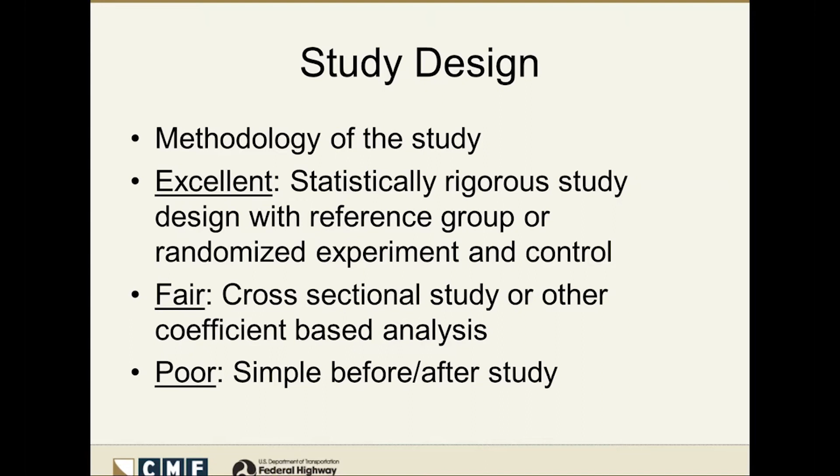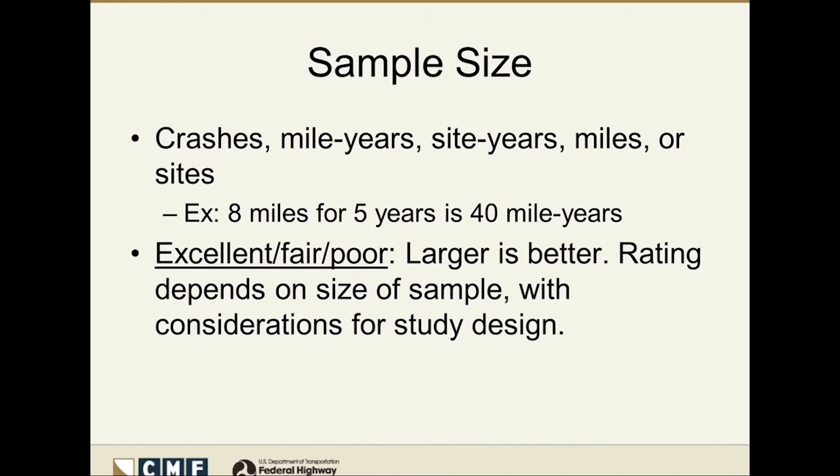The second criteria is sample size, and this is just reflecting what was the data used to develop the CMF, and this could be the number of crashes that were used, mile years, site years, miles, or sites, mainly being intersections in this case. And just FYI, a mile year is if you had 8 miles in your study and you studied it for 5 years, you have 40 mile years. So it depends on how the authors report the study details as to what they used. But we look at that to see what is the sample size, and of course, larger is better. And the exact rating depends on the size of the sample, with some considerations in there for what type of study design was being used.

The third one is the standard error, which is a statistical indication of the reliability of the CMF value itself, so numerical value here. And this one, the rating depends on the significance level. So if the CMF is significant at a high confidence level of 95%, and the example there shows a CMF of 0.8, so some decent reduction to whatever countermeasure the CMF is referring to. If the standard error is 0.05, that's a pretty low standard error, and that CMF is significant at a 95% level, so that would get an excellent rating.

Fair rating would go to those CMFs that are significant at 90% but not at 95%. So if you have that same CMF of 0.8, but the standard error is now higher at 0.11, that would land in the fair rating. And then a poor rating would be those that aren't even significant at a 90% level. So if you have that 0.8 CMF, a standard error of 0.2 or anything greater than that would be not significant at that level.

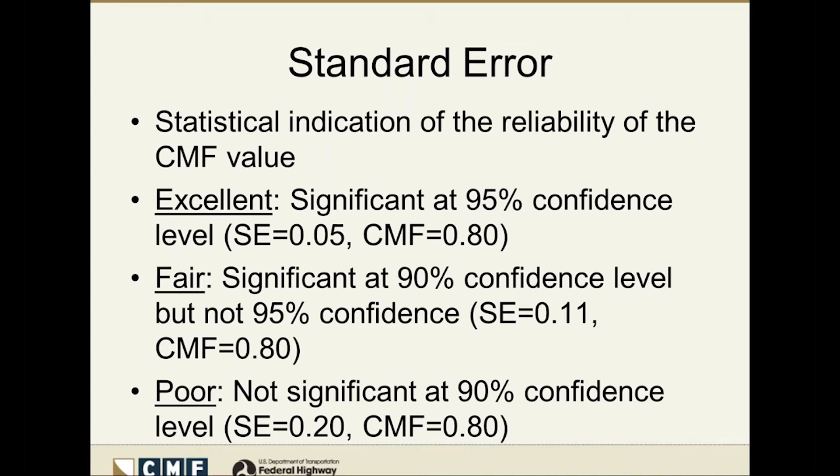Potential bias is the fourth criterion. This is a bit more of a wide open category in terms of looking at any biases that were observed by our review team here. So this could be anything from the makeup of the group of sites that were used for the study to issues with the analysis or the modeling, anything like that. And just in general, if there are biases noted, it brings down the rating here, so it's a better rating for fewer biases.

And the last one is data source, and it really deals with the diversity of the data used to develop the CMFs. And basically, the more diverse the data, the better the rating. So an excellent rating would be diversity of multiple states with different geographies, so representing a lot of different types of conditions, basically leading to a CMF that can be more widely applied.

Fair would be if the CMF was developed using sites within just one state, but throughout different areas of the state, perhaps California, but from the north and the south parts and all over. Whereas the poor rating here would be just, let's say, one town in one state, one city in one state, so limited diversity there.

All right. So for example, if you were to do a search and you're looking at installing a traffic signal, you're going to search on the clearinghouse, and of course we search by the countermeasure name, and I'm going to use the fewest keywords possible to give me a fairly wide set of results.

All right, so you can see that we've got 581 CMFs returned for that search, so a pretty large stack of CMFs. Because this is going to involve anything that has a keyword that involves signal, which also could be something like signalized. Anything that involves those six letters essentially is going to come up in this search.

So then we can use the filters to bring that down somewhat. Let's say I might be interested only in CMFs that are 3, 4, 5 stars. Because I have such a large stack, I can filter down and just look at those higher rated star CMFs. So click on those and click filter, and now it brings the total to 389. Okay, so we've whittled that down some.

Going further down, I might be interested in only angle crashes at the particular intersection, so I can go under crash type and select angle crash and do another filtering. I can come down here and click on filter results. That brings the set of results down a pretty good bit. I'm left with 38 CMFs now, and these are CMFs that are for angle crashes and are also 3, 4, or 5 star rated.

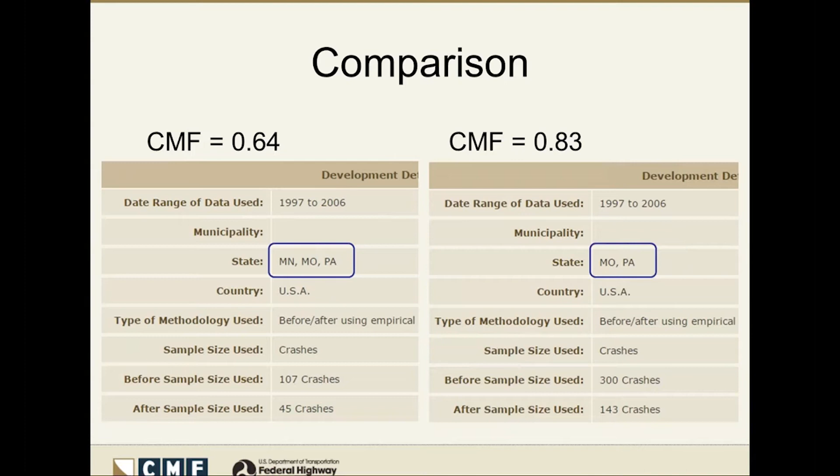I wanted to mention a few other features we've got on the CMF Clearinghouse, a few recently added. We've got a reorganized navigation, which I'll look at in a second. We've added a user guide for new users or those who don't have as much experience. A resource I want to point out is the state CMF lists, and then I'll mention an upcoming tool we've got. If you'll pardon me, I'm going to go back over to the website to show you some of these.

Okay, so on the front page of the Clearinghouse, some of you may have noticed that across the top, the navigation bar has been restructured, really trying to group the resources we're offering in terms of the different ways in which you use CMFs. So the first one there has a pull down, and it has everything about the Clearinghouse itself. I'll come back to that in a second.

Next to that is a group of resources for using CMFs, so guidance documents related to applying CMFs, and there are links for trainings on that topic.

The third one there is for developing CMFs, and this would be primarily for the researcher crowd who are conducting studies to develop CMFs. So we've got guidance there related to methodologies for developing CMFs, what data are needed, what are the protocols for reporting when you're authoring a study, as well as resources about CMF needs for future studies.

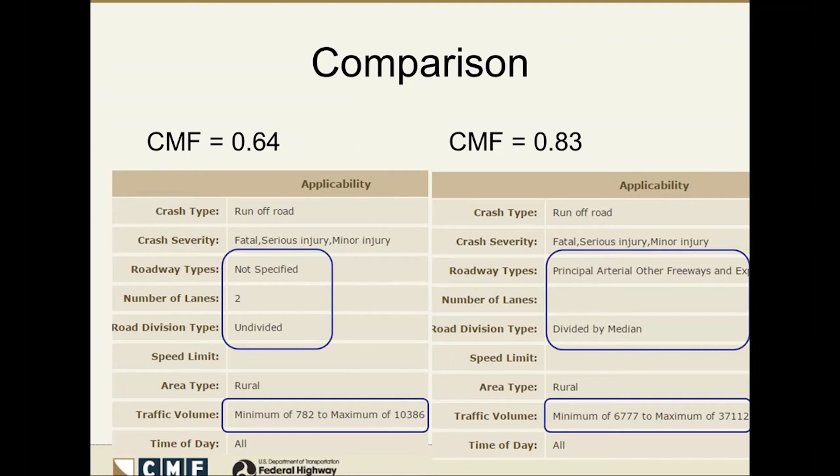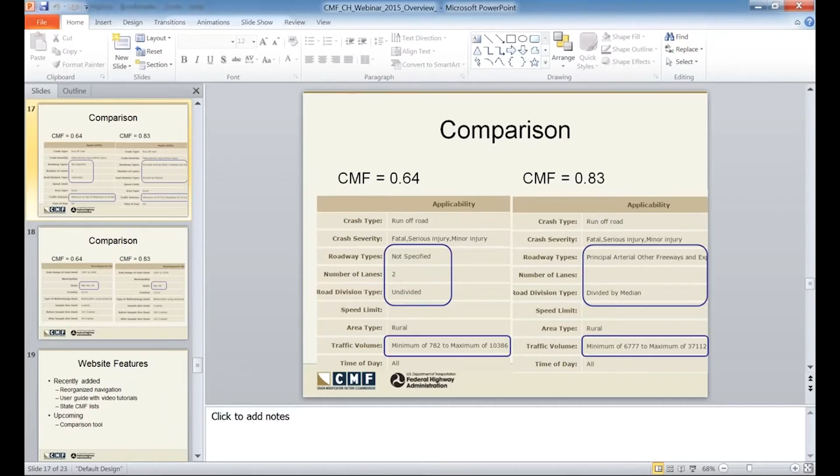Yeah, okay. Well, as Caroline is changing control over to Frank Gross, I'll just go ahead and introduce Frank, who is a member of our CMF Clearinghouse team. And as Karen said, there was a lot of interest in crash prediction models and the use of CMFs in those. So we're going to hear from Dr. Frank Gross now.

All right, thanks, Daniel. How does everything look? Yep, we can see your screen. All right, terrific. All right, welcome everyone.

And I just hit my afternoon lull, so how about a little bit of acronym soup to get us started? I've been told that a large dose of acronyms is even better than coffee for that afternoon lull, so let's give it a try.

So CMFs and CPMs or SPFs. Just to clarify, CPM stands for Crash Prediction Model, and SPF stands for Safety Performance Function. I think we're all familiar with the term CMF by now, but CPMs and SPFs are really the same thing. They're equations that provide us a method for predicting crashes based on traffic volumes and perhaps other site characteristics. So what we're really talking about is CMFs and the predictive method.

Just a quick look at where we're going today. I'll start with a brief overview of the predictive method, which is Part C of the Highway Safety Manual, and then I'll provide another quick overview of Part D of the Highway Safety Manual, which is individual CMFs. And then I'll wrap up by pulling this all together and providing a little bit more of a detailed discussion on how to use CMFs from Part D or from the CMF Clearinghouse with the Part C predictive method.

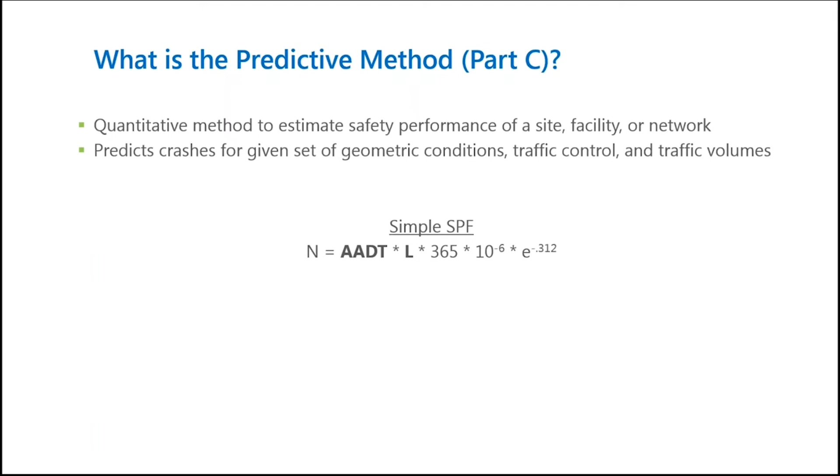The first equation is an example, a very simple example of a safety performance function from the Highway Safety Manual, and this SPF represents the equation for rural two-lane undivided roads. So the predicted crashes, N, on the left-hand side of the equation, is a function of segment length L, traffic volume, which is AADT in this case, and then the remainder of the equation, which is all multipliers.

So that was a very simple example. Here's a little bit more of a complex SPF. Some people might call it a crash prediction model, in that it includes other variables. In this case, you have additional variables beyond traffic volume to account for the number of nearby driveways and the intersection skew angle. So this SPF is related to intersections.

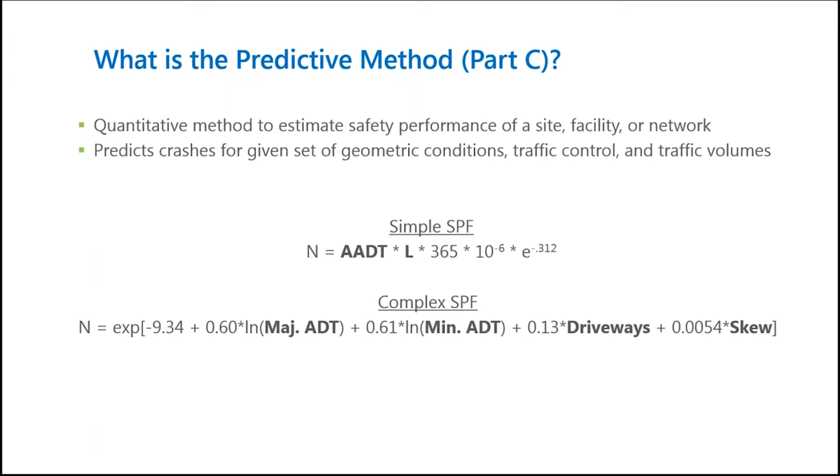So the purpose of the predictive method, as I mentioned, is really to help consider safety performance in the decision-making process. It provides an opportunity to, one, quantify the safety performance, either of an existing or a proposed facility. You could also compare the safety performance of various design alternatives. You can use the predictive method in evaluating the safety effectiveness of projects. And as I'll discuss a little later, you can use this method to help justify design exceptions based on safety impacts.

The photos at the bottom of this slide represent a before and after condition for an actual project that was implemented. The planners and designers of this project could have used the predictive method to estimate the safety performance under these two conditions before making any final decisions. Ultimately, they decided to convert the 4-lane undivided facility on the left to a 2-lane median divided facility shown on the right. The predictive method can help you estimate what the crashes would be under those two scenarios.

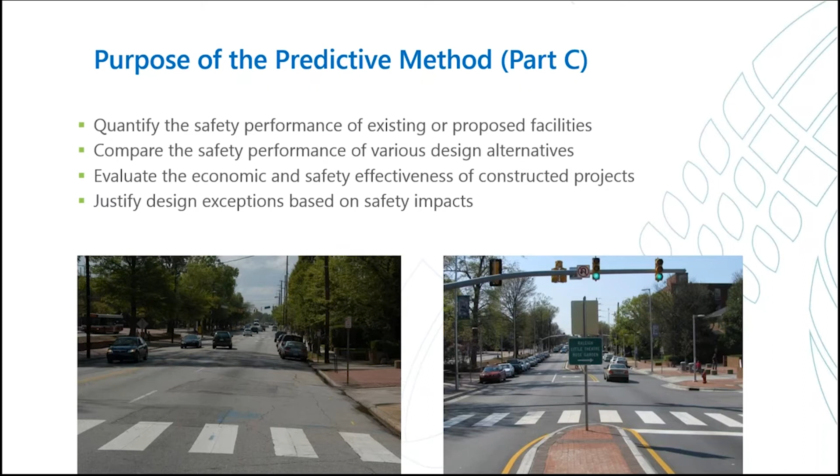All right, so that was a real brief introduction to the predictive method, and I think most of us are familiar with CMFs in general, but just as a real quick overview, CMFs provide a quantitative method to estimate the change in safety performance when you have a change in site conditions.

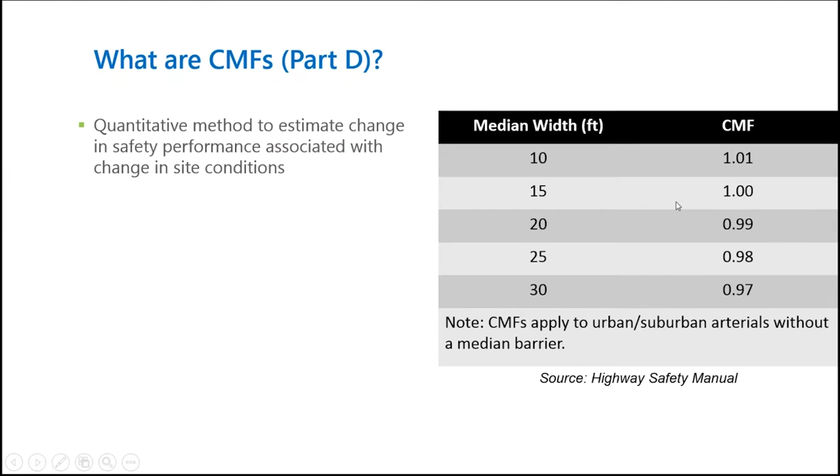The example on this slide shows CMFs from the Highway Safety Manual related to median width. In this case, the baseline condition with a CMF of 1 is a median width of 15 feet, and the other CMFs show what would happen if you were to decrease the median width to 10 feet or increase the median width from 20 to 25 to 30 feet. You can see what the percent reduction in target crashes would be.

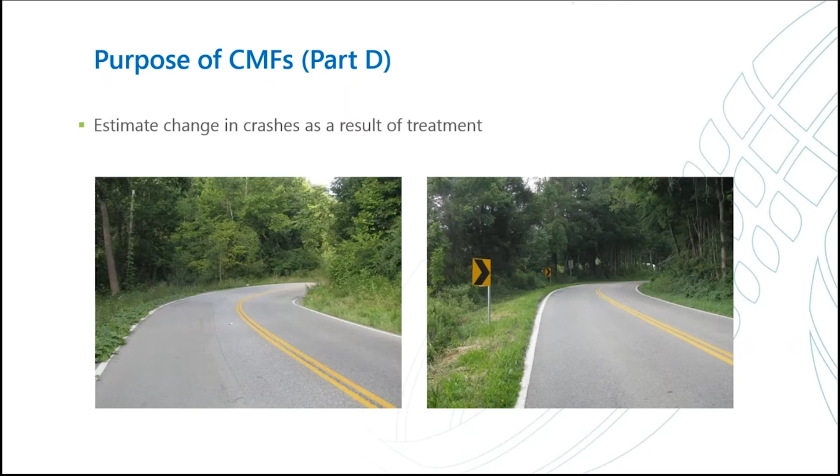So again, the purpose of CMFs is really to estimate the change in crashes as a result of some potential treatment. Another example is to determine the effect of adding chevrons on a rural horizontal curve. And I think most of us are fairly familiar with this process.

So how are CMFs integrated or used in the predictive method? They're primarily used to adjust the base predicted crash frequency from SPFs. SPFs give you some predicted number for a set of base conditions. And if the location of interest differs from those base conditions, then you need to adjust that prediction to the conditions of interest. So there's two primary ways to adjust that prediction, and this is an important distinction and really kind of the underlying point of this presentation.

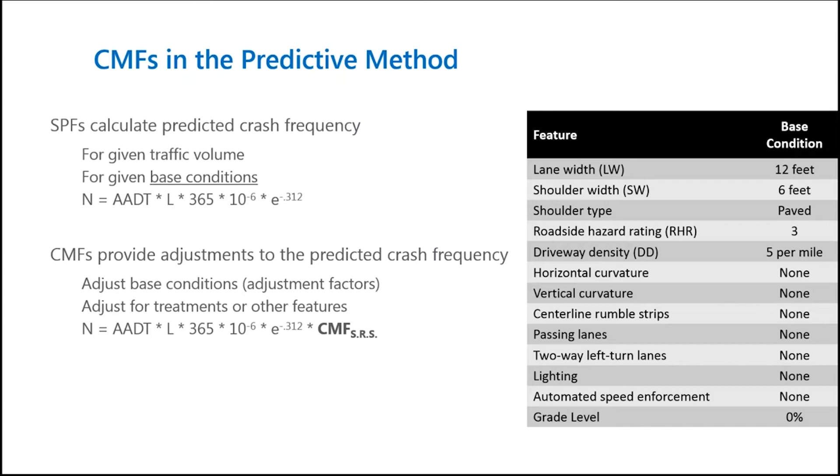Here's an example, a very simple example using the Part C predictive method with some basic adjustment factors. In this example, a design engineer wants to calculate the predicted safety performance of a 1-mile section of rural two-lane road with a traffic volume of 6,000 vehicles per day. The first step is to identify a suitable SPF and the associated base conditions. In this case, the SPF is given from the Highway Safety Manual, and the base conditions are shown in the table on the right, along with the proposed conditions.

The predicted crashes is calculated by simply plugging in the traffic volume and segment length of 6,000 vehicles per day and 1 mile, and that results in 1.6 predicted crashes per year. Now that is for this set of base conditions: 12-foot lanes, 6-foot paved shoulders, and so on. Now the condition of interest differs. The designer is interested in 11-foot lanes and 2-foot shoulders. So we need to identify and apply adjustment factors from Part C of the HSM.

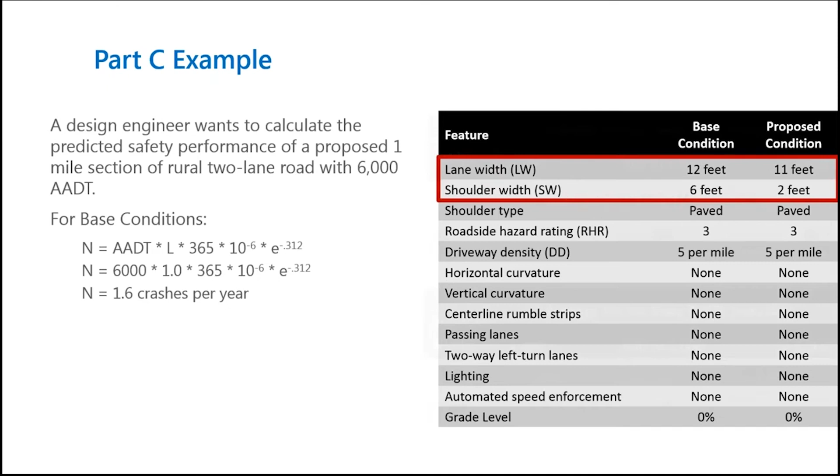Taking those adjustment factors, we can apply them directly to our base prediction. Our base prediction was 1.6 crashes per year. We multiply that by 1.05 and again by 1.3, and estimate 2.2 crashes per year for the conditions of interest.

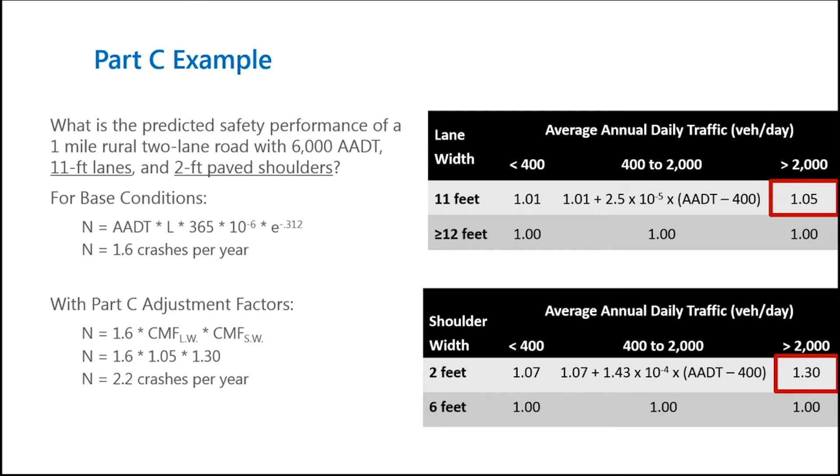That covers simple adjustments from the Part C predictive method using the Part C adjustment factors. Now let's briefly review how to apply CMFs from Part D of the HSM for another condition.

I'll use another example. In this case, a traffic engineer wants to estimate the potential safety effect of installing a traffic signal at a rural stop-controlled intersection. Let's assume there were 50 crashes over a 10-year period, an average of 5 crashes per year, and the CMF for this treatment is 0.56, applied to total crashes.

Applying the CMF of 0.56 to the 5 crashes per year without treatment, we estimate 2.8 crashes per year with treatment. This is equivalent to a reduction of 2.2 crashes per year if we subtract the crashes with treatment from the crashes without treatment.

One note here: this is a very simple example, and I used the average crashes per year without treatment to estimate what we would expect if we didn't install a traffic signal. You could use the predictive method to do the same thing, using an SPF to predict what would happen with the given traffic volumes if you were to remain under the stop control condition, which would help improve the reliability of the results.

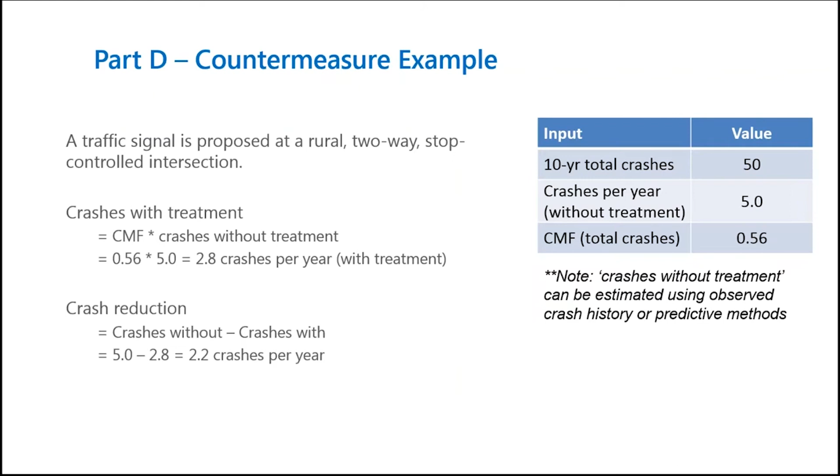All right, now let's pull it all together. Going back to the first example, let's assume the designer is considering shoulder rumble strips to address a known issue with runoff road crashes. If we review that table on the right again, there are no base conditions or adjustment factors in Part C for shoulder rumble strips.

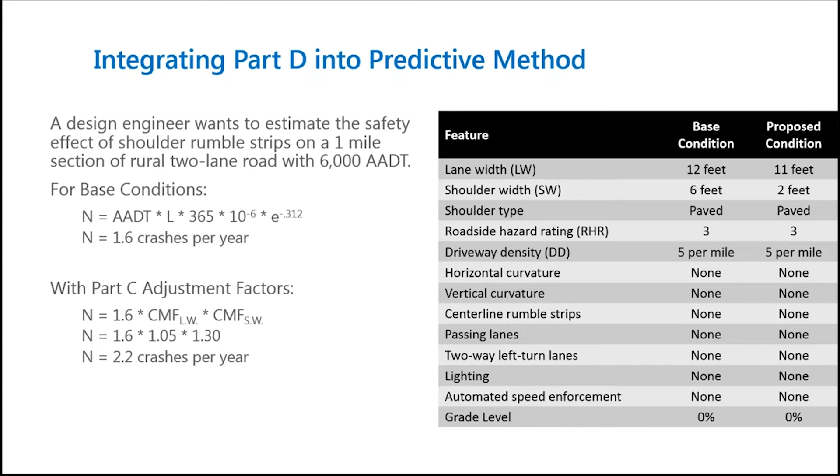So in this case, you'll need to pull a CMF from Part D, or from the CMF Clearinghouse, or another source. Part D does not contain any CMFs for shoulder rumble strips for 2-lane rural roads either. So I went to the CMF Clearinghouse, and as Daniel showed, there are hundreds of CMFs for installing shoulder rumble strips there. I was able to narrow this down to CMFs with 4 or more stars for rural 2-lane roads that apply to total crashes.

I used the filters and got down to 4 CMFs, still with 4 choices, and the difference here is the state they were developed from. In this case, let's assume we're considering a roadway in Pennsylvania, and the designer determined that the CMF from Pennsylvania was most applicable. So we'll use the CMF of 0.76 for adjusting the predicted crashes even further.

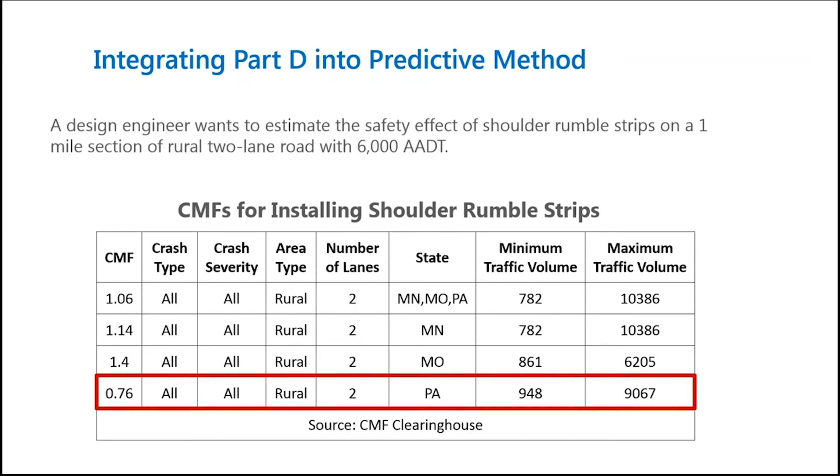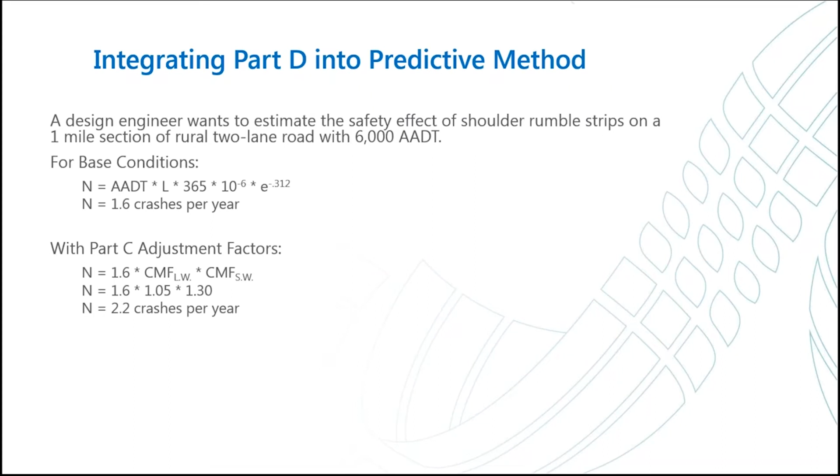Previously, we estimated the predicted crashes per year for base conditions using an SPF from Part C of the Highway Safety Manual - that was base conditions with 12-foot lanes and 6-foot shoulders. We were interested in a roadway with 11-foot lanes and 2-foot shoulders, so we applied adjustment factors from Part C. Finally, we can apply the CMF of 0.76 to this last prediction to estimate the number of crashes per year with 11-foot lanes, 2-foot shoulders, and shoulder rumble strips.

So you can see how this would be useful in the decision-making process, and more specifically in the design exception process, as I listed earlier.

So for example, if you're considering a design exception, maybe the design standard calls for a 12-foot lane and 6-foot shoulder, but existing conditions may limit your cross-section to 11-foot lanes with 2-foot shoulders. So you're able to see first how your initial proposed design exception compares to the design standard using the predicted crashes.

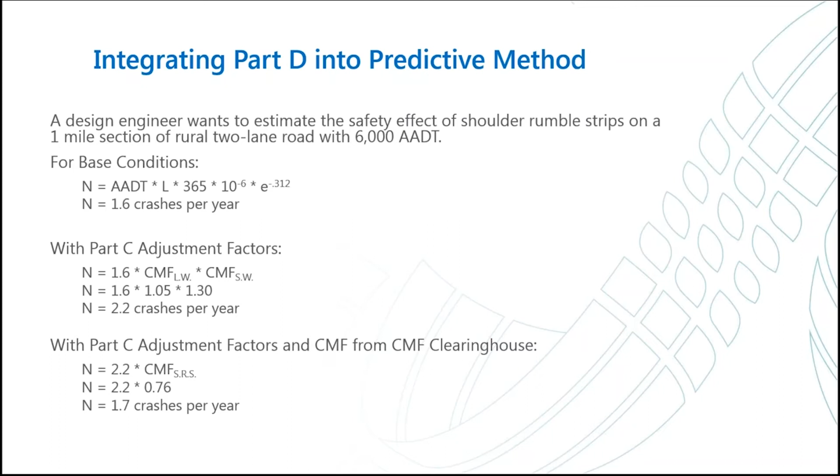And then you could justify mitigation measures saying, well, to mitigate the potential adverse impact of reducing the lane and shoulder width, we're going to install shoulder rumble strips, and now our predicted crashes are fairly close to what the predicted crashes would be for the design standards. So that's in a nutshell integrating the Part D CMFs or CMFs from the clearinghouse into the predictive method. So just to wrap up, let's talk about a few do's and don'ts.

So the first one is, do apply Part C adjustment factors to the applicable SPFs from Part C of the Highway Safety Manual. Do not, on the right-hand side, apply those Part C adjustment factors to other SPFs or to observed crashes if you're using observed crash history. So the Part C adjustment factors are specific to the Part C SPFs.

If you're using Part D of the Highway Safety Manual, you can go ahead and apply those to either the predicted crashes, as I've shown in the example, or to your average observed crash history, as long as your CMFs apply to your given scenario of interest. Excuse me.

So the don't with the Part D CMFs is don't apply those Part D CMFs to inapplicable scenarios. So for example, don't apply a CMF for total crashes to estimate the change in run-off-road crashes. Similarly, you should not apply a CMF for an urban 4-lane divided facility to a rural 2-lane road. So those are some of the do's and don'ts.

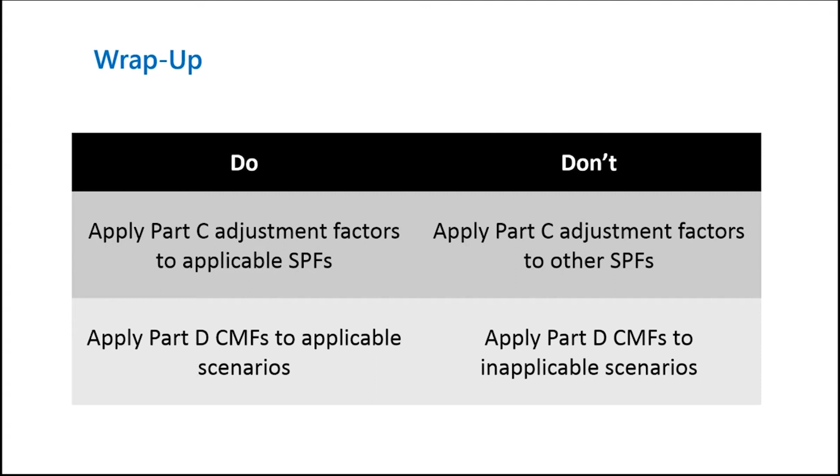And Daniel was thinking that we might want to make up a t-shirt and start wearing these around to remind everybody, and I thought that was a pretty good idea. So with that thought, I'll turn it back over and pass it on to Stephen. Thanks, Frank. And yeah, we're all about the marketing here in the clearinghouse, so make some swag to hand out here. Well, our next presenter is Stephen Reed from Virginia.

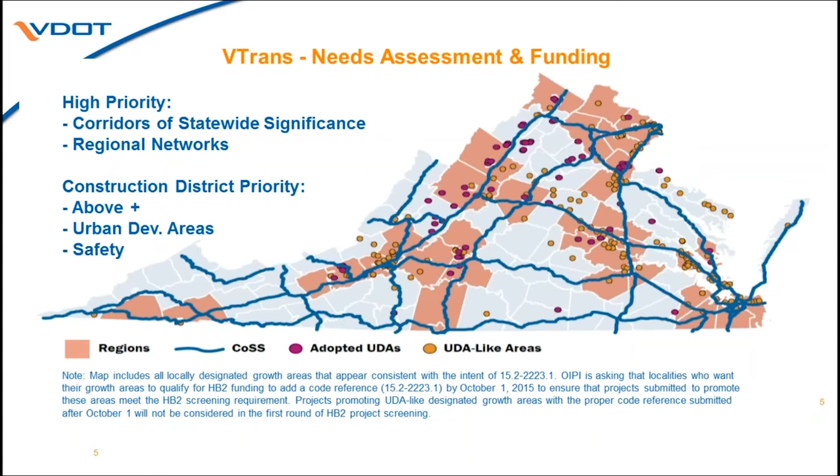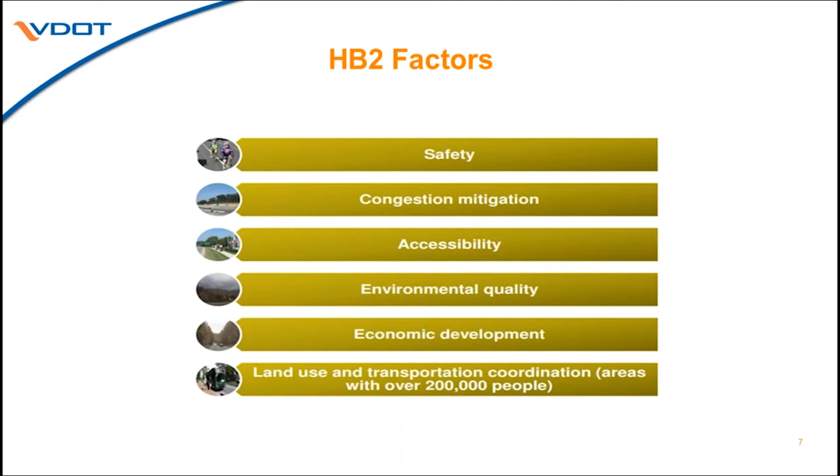There's accessibility measures, which involve some multimodal factors. There's environmental quality, economic development in terms of parcels that are served that are undeveloped at this point in time, as well as land use for those areas that are in the larger MPOs, those with over 200,000 residents. So although I put safety first, it is not the top factor by any means.

The state was divided up into what we're calling typologies, into different categories based on essentially land use density. And so you can see what we call our urban crescent of Northern Virginia, Richmond, and Hampton Roads, our higher level categories A and B, and the rest of the state more or less are categories C and D.

And so safety has a different factor and different priority in each of those different areas, with the value ranging from 5% in the more urbanized areas up to 30% of the total score in the more rural areas of the Commonwealth.

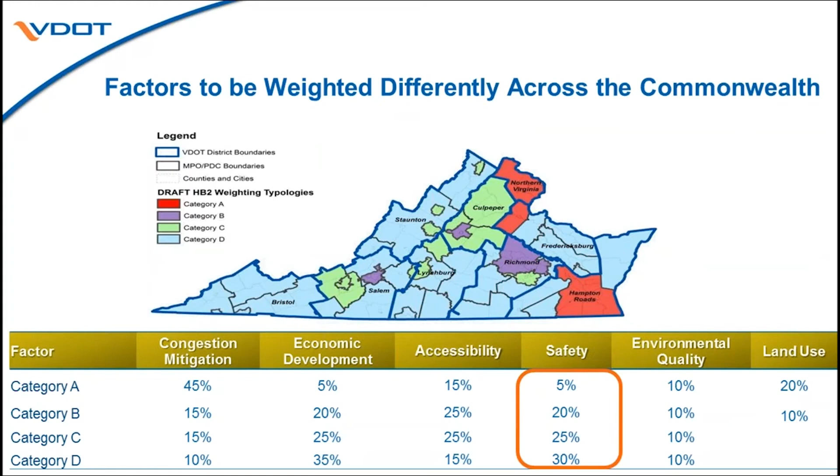But today I'm only going to be talking about highway and bicycle and pedestrian type projects that are involved with an existing roadway alignment. So, knowing that we couldn't go through the whole process of looking at what Frank described quite nicely for Part C and D, frankly not knowing how many projects we were going to receive, we knew we had to develop a planning level application of CMFs.

And so we began last winter to look at this process, actually working with Dr. Gross and with Daniel to develop these planning level CMFs for our applied projects. In fact, we had over 300 projects submitted, and so I'll walk you through at the end of the presentation an example of how we applied these CMFs for those projects.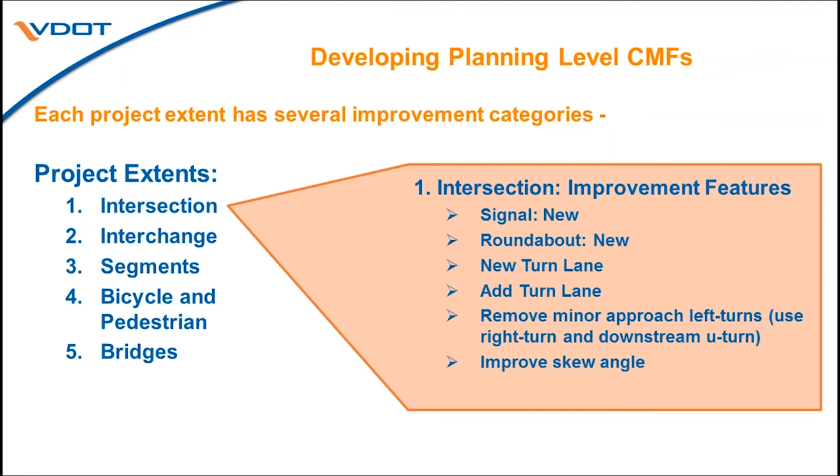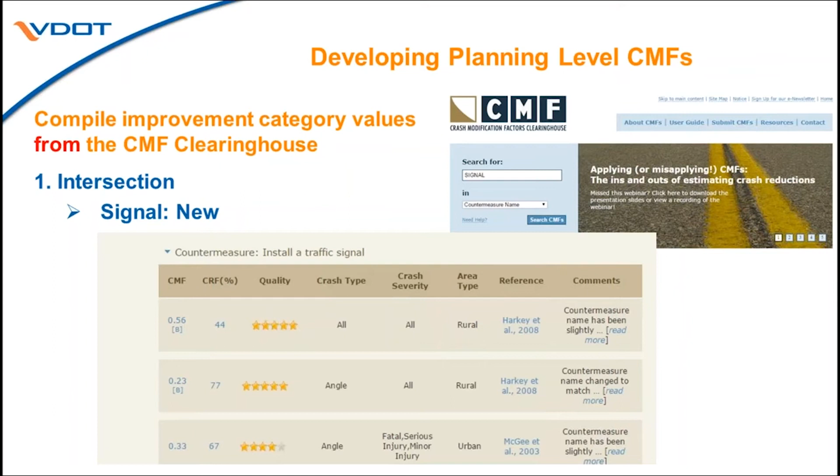The first step that we needed to do was to determine what were those applicable CMFs. And so, as Daniel was presenting, we were able to filter the clearinghouse database and determine down to those CMFs that we thought would be applicable. So for that first one that we have in the list before, new signal, we knew we could filter to that. And then we could look at the database to determine which CMFs were applicable.

So those higher star quality ones, we knew that we wanted to look at all crash types, not wanting to filter our crash database for specific targeted crashes for each individual improvement at the planning level, not necessarily being able to define that.

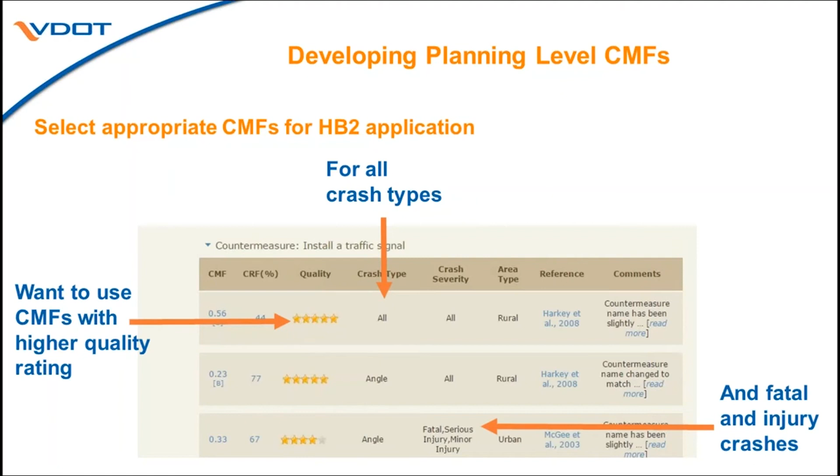And then we also wanted to look at those that had crash severity that looked at fatal and injury consequences to those crashes. So we were able to filter the data quite nicely for these and define the range that were there. So as Frank mentioned, there's quite a range for any individual improvement type, even after filtering for those attributes that we were interested in.

And so you can see here that we found from the data that there was a maximum and minimum available across those multiple published CMFs, and we used that to develop averages, medians, and the standard deviation of those CMFs. And from that information, we were able to look at the range that we would expect, as well as what was typical or average. And so in this case, you can see that the average and the median are close. The standard deviation is reasonable, and so we decided to pick close to the average planning level CMF for all new signals, regardless of where they are across the state.

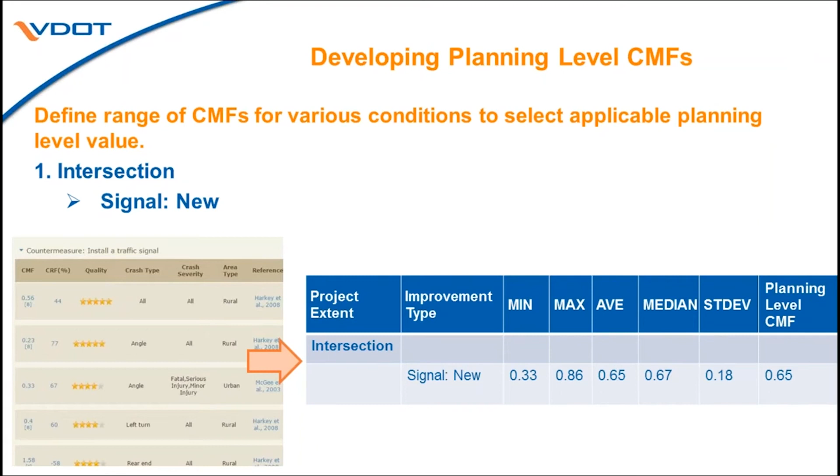For some improvement categories, we needed to look at a range or a combination of countermeasures. So, for example, not really knowing at the planning level what access management may be proposed, just that they may be looking at multiple treatments further on in the project development process. We knew there were several access management related type improvements, as an example, as you see listed here, with the max, min, average, median, and standard deviation that we looked at. And we had to make a decision of what was a reasonable one that we would expect to use for either a combination or one of these in particular that may be called out from the applicant itself.

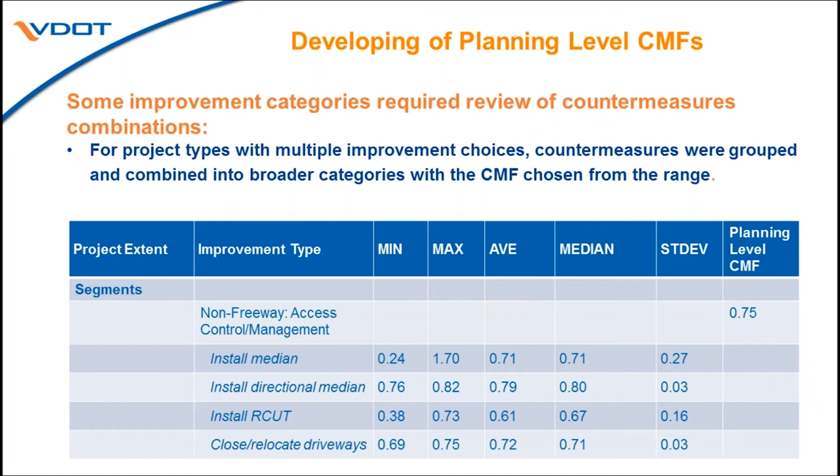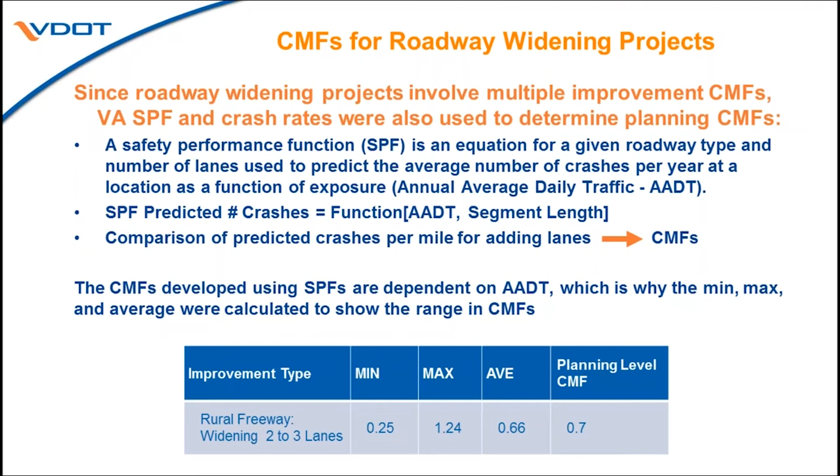And specifically, we first looked at our safety performance functions, which we had developed for all the site subtypes that you'll see in Part B and that are implemented through Safety Analyst AASHTOWare. And so in this case, we were looking at SPFs, for example, of widening a rural freeway from 2 to 3 lanes in each direction. And because those are functions based on AADT, we could look at the minimum, maximum, and average values. And in the end, we would pick a number close to that average and more in the range of typical volumes you would expect to widen a facility from 2 to 3 lanes based on the volume to capacity ratio. However, in some cases, that value was approaching 1 or greater than 1, particularly in the urban areas.

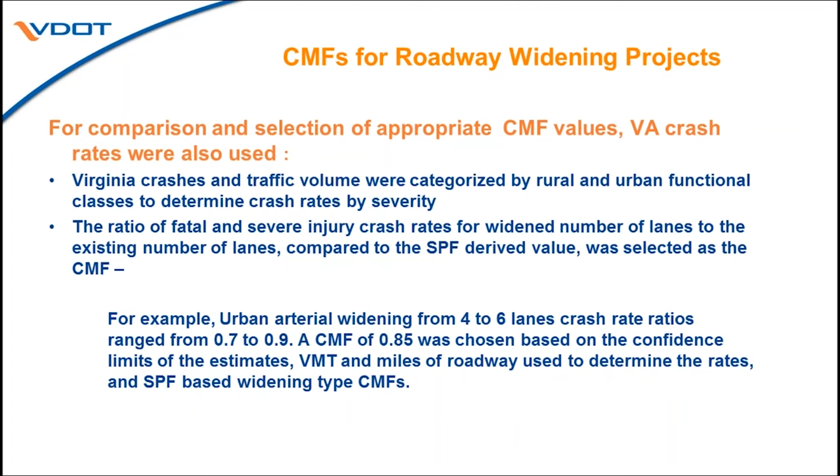And so we decided to look at our Virginia crash database and crash rates, which we developed statewide, multiple year average volumes based on federal functional classification and number of lanes. And so based on that, we could look at the ratio of those crash rates going from, for example, rural 2-lane or urban 4-lane to 6-lane, as there is in this example, and look at the ratio of those ranges as well over the different functional classes that we have our roadway inventory categorized as. And so in this case, we saw a range. We could look at the standard error of that and look at a CMF that looked applicable compared to other CMFs, for example, of going from 4 to 8 lanes or from 2 to 3 lanes, so that the CMFs were consistent across all of those improvement types.

So where did we end up? We ended up with a list of about 50 different CMFs. Those are available on the House Bill 2 website. I'm going to walk you through a few of those quickly and then give you an example.

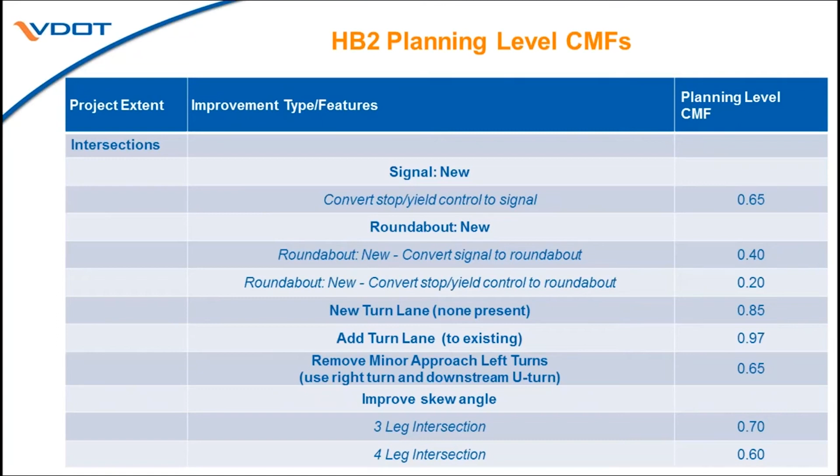Resulting in a CMF of 0.97. Here's the range of interchange type CMFs. These are being applied for those improvements that are called out segment by segment within an interchange. And we're also looking at the range of volume reductions given different interchange improvements, like removing ramps or adding ramps.

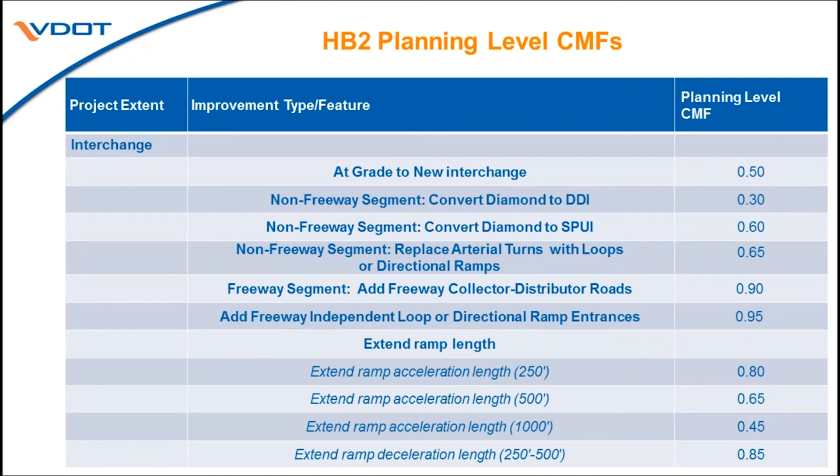And in fact, during the process, it's not listed here, we had to develop a CMF for adding lanes to exit and entrance ramps. But that has not been published yet.

For highway segments, they're broken into non-freeway versus freeway. So here's the listing for non-freeway, which includes operational improvements at the top, as well as reconstruction, which looks at a range of roadside and roadway alignment type improvement CMFs, all the way through to those where we used SPFs and our crash rate to determine planning level CMFs.

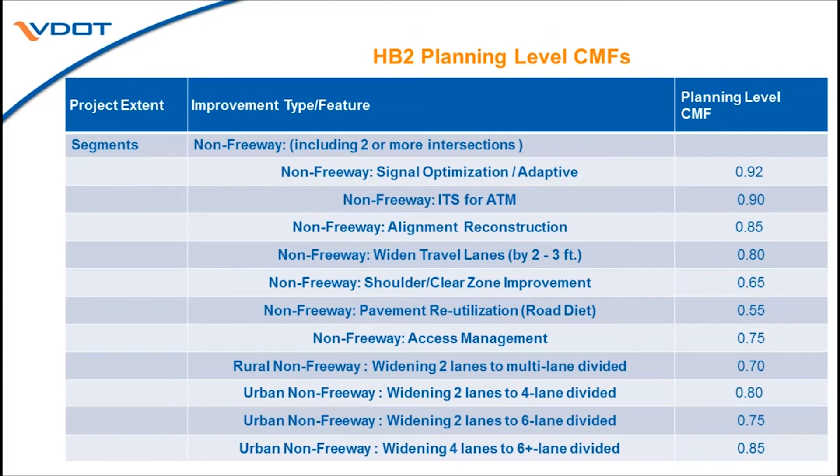Here are the freeway improvements, again with operational at the top, and those widening projects at the bottom.

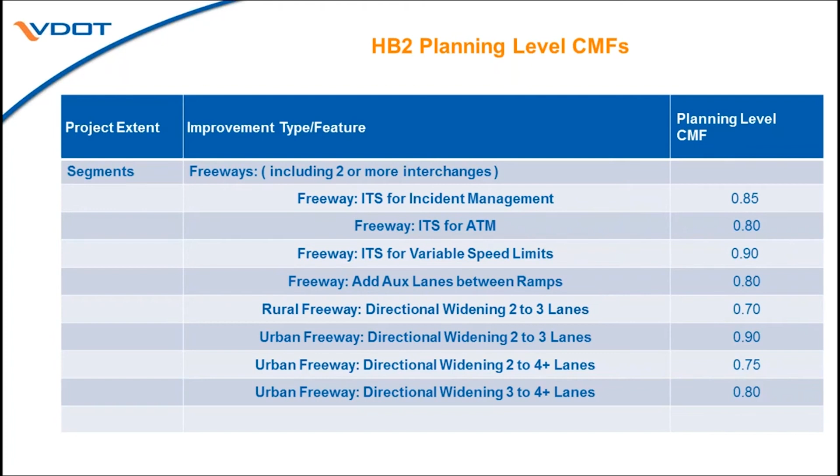The most interesting one was that because it is a multimodal approach, we needed to come up with surrogates for bicycle and pedestrian type projects. Most of the CMFs that you will see published only involve pedestrian or bicycle crashes, or bike-to-ped crashes, from some of the work out of Europe.

So for our case, we actually looked at a surrogate of what that improvement would do to the cross-section, and started to look at shoulder width, clear zone, and distance to fixed objects as surrogates for adding these types of linear improvements, as well as at-grade crossings. There are some CMFs available for that, which we included as well.

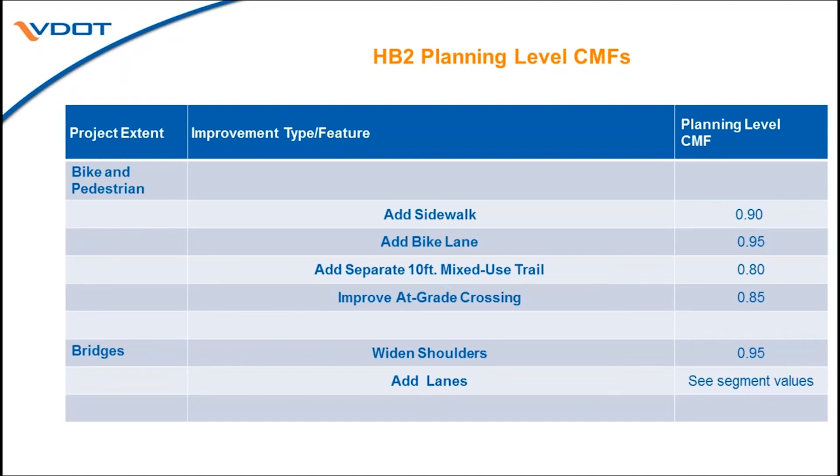And then you can see at the bottom, to wrap it up, the bridges are essentially treated like a segment type project.

So let's roll through an example here of how we applied these CMFs. The first step was what we call segmenting the project, to apply an appropriate CMF and the appropriate crashes for a given section of roadway.

So you can see here in the fuchsia, we had a roadway which was being widened to a super street type cross-section for most of the length. However, at the very end of it, there was a major intersection upgrade, which you can see in the segment impacted there by the turn lanes in blue and orange. And then south of the blue, in the green line, you can see there was a widening section that's outside of the influence area of the intersection.

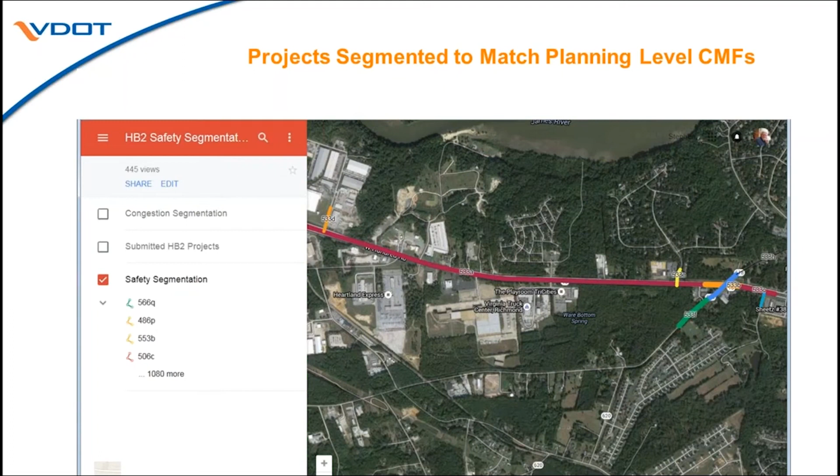The little stubbies coming off the main widening are small sections of roadway captured to get the appropriate crashes coded to that crossroad route ID, so that all the crashes are considered along the corridor from our roadway inventory. That first step allowed us to look at the appropriate CMF, the improvement type, and the crashes that would be associated with that.

Then we were able to take that information and enter it into what we're calling a master spreadsheet for scoring. And all of those sub-segments, as you can see here, this one had sub-segments A through S added to it.

The information was retrieved from our online geospatial crash database to retrieve the begin and end mile points, the AADTs, and thus the VMT to calculate crash rates, and the crashes by the KABCO scale, so that we could pull out those K and A, the fatality and severe injury crashes, in order to develop our Safety 1 and Safety 2 measures of reductions in the frequency and in the rate for those.

You can see across the bottom of this spreadsheet capture here that there's a sheet for existing alignment, transit, and travel demand management type projects that would occur on an existing alignment. There's also a methodology developed for new alignments that involves using travel demand models, and another sheet for rail freight type projects, which are scored based on reduction in truck trips due to rail freight improvements. But that's a discussion for another day.

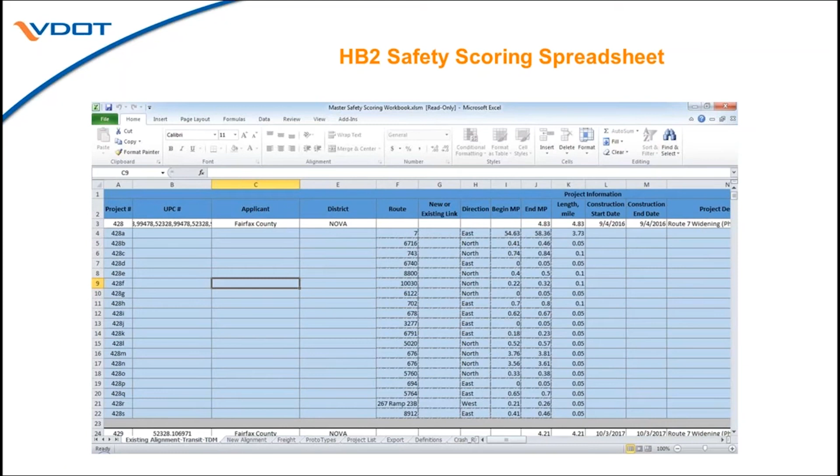So we have a different sheet for each project type, and a different row for each segment. As an example, we could have a project like I showed you in the segmentation that was primarily a roadway widening project, where we would look at the CMF for going from 2 to 4 lanes divided, in an urban versus rural situation, and develop the reductions in our Safety 1 and Safety 2 factors there that you can see—what we're calling projects avoided or projects reduced by that improvement.

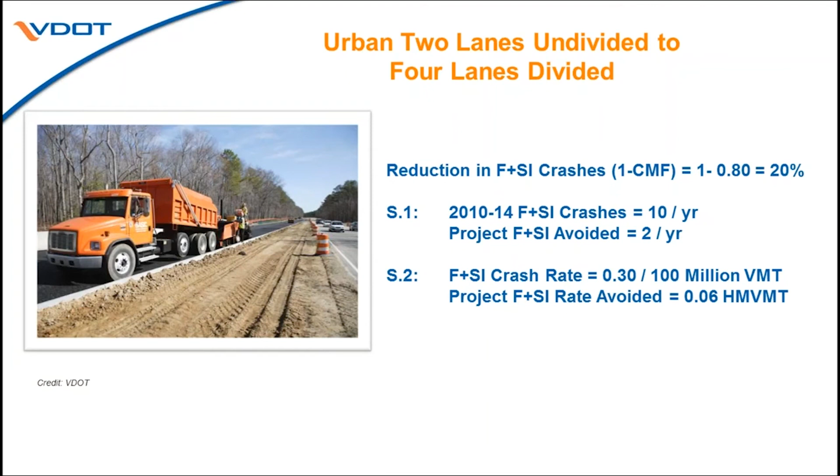And so that would be segmented out, which has a very nice CMF of reducing those conflict points and speed. And so for severe crashes with a CMF of 0.2, we get a very steep reduction, and reduce those crashes that could occur at that intersection. So summing those all up over all the segments in the project, we could see how relatively those projects would reduce the severe injuries and the severe injury rate.

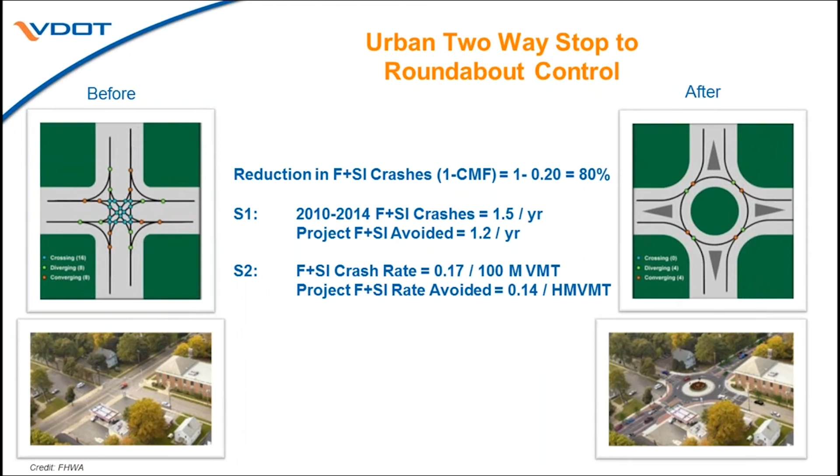Now, all of those projects then would be sort ranked based on those two measures, and everything is relative for all of the scores for all of our factors. And so the one with the highest reduction in each of those two safety measures would essentially get a score of 100, down to those that had no reduction or no severe crashes identified, which would essentially get a score of 0 for those two safety factors. And that would be added into all of the other factors to help us identify the priorities for those improvements.

If you want to know more about that priority process, about our published CMFs, a lot of what I've presented today is available on the website under the Resources tab that you see here, as well as how we developed and looked at needs based on the VTrans work conducted by our Office of Intermodal Planning and Investment, and working with our sister agency, Department of Rail and Public Transportation. It's been a pleasure to present this to you from our VDOT perspective. And so with that, I turn it back.

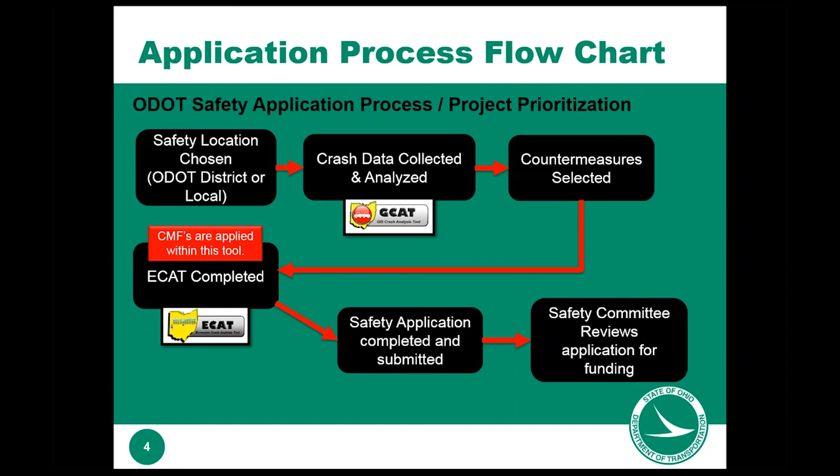So in regards to how the location is chosen, we have projects developed the three following ways. The first set there is the ODOT priority list, and as you can see there's 3 in the urban category and 3 in the rural. Those are annual priority lists developed through Safety Analyst.

The second way is if it's an ODOT sponsored project. That would be more like a spot location that might not have been on a priority list, but has an emerging crash trend or something, maybe in the past year or two, that the district is more or less focused on.

And then the third one is the local sponsor that comes in, and that can be a spot location for their interest, maybe a high-ranking crash location on one of their priority lists, whether it be in their local entity or like the MPO.

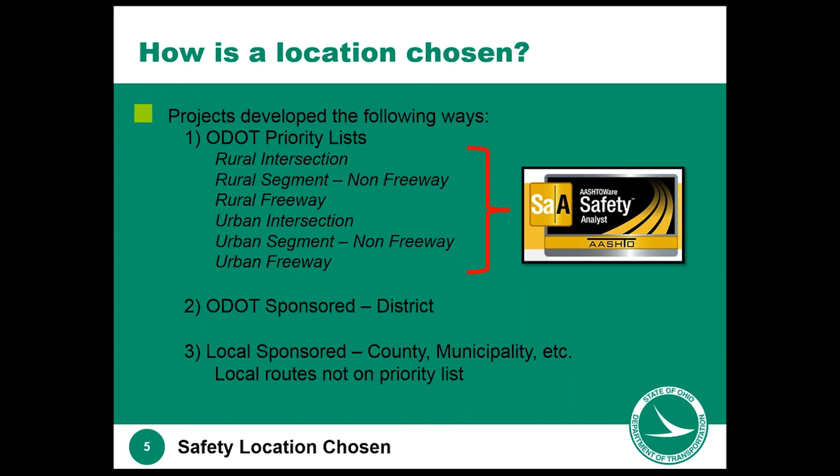So going from when the location is chosen to pulling the crashes for that location, we use one of our tools here, which we refer to as GCAT, our GIS Crash Analysis Tool. This is used to query crash data. So anywhere in the state, as you can see on the screen, it shows a circle around the intersection, and we can generate crashes for any specific years, specific crash types, anything like that, to pull the crash data, which we can then use to analyze it.

So I've provided an example here. This was an actual location submitted a couple years ago, and as you can see, as the road goes east to west, the major route, you can see the number of crashes there where there were rear ends due to vehicles trying to make that left-hand turn.

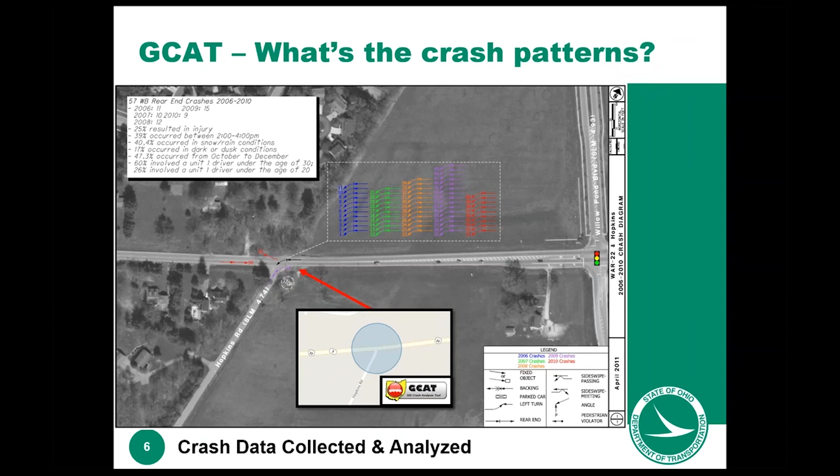So this is something where we pull the crash data, and after analyzing it, we can see the trends that develop from it, and that moves us forward into countermeasure selection. So based on what we see here, what's the best way to address these 57 rear-end crashes that occurred within these 5 years?

So I have in the bottom right corner of the screen a countermeasure that was pulled from the clearinghouse, providing a left turn lane on one major road approach. You can see the CMF for that is 0.56, and the one below that is 0.45. The difference between those two is not in crash type, but in crash severity — the 0.45 is for fatal and serious injury and minor injury crashes. So that would be the CMF applied for this countermeasure.

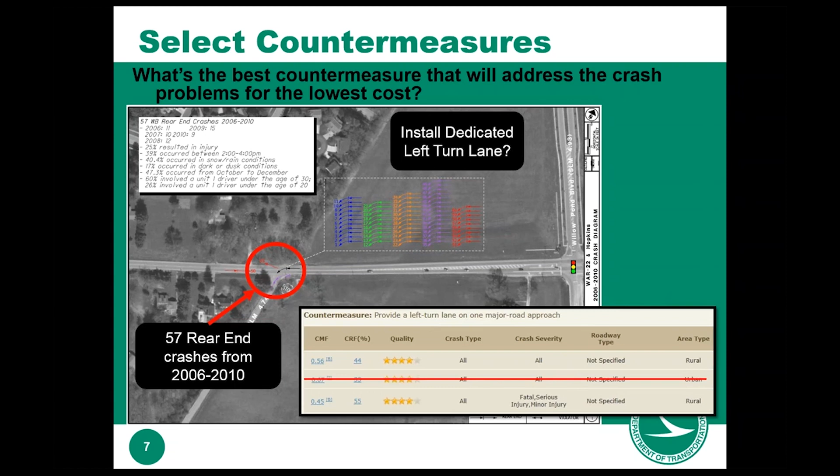So that wraps up the crash analysis and being able to select the countermeasure based on what we see from the crashes. Moving that forward, our next step is looking at it from a benefit cost perspective. So our Economic Crash Analysis Tool imports that crash data that we downloaded from our GCAT run, puts it in here, and calculates the predicted crash frequencies, providing a value for the potential for safety improvement.

It does all the background calculations as seen in the HSM. It takes into account crashes, site type, and then provides a net present value of how much the safety benefits are worth for this project.

So if you look at the bottom box on the right-hand side of your screen, where it says net present value of safety benefits, you can see for this project, based on the history of crashes that have occurred there, it's 1.4 million as far as the net present value for that project. And so we use that number to compare against the countermeasure that we're selecting.

So within the red box, you can see our construct left turn lane, and this is where we can enter the countermeasures based on what we want to address the crash problem with. You can see the service life, the initial cost of the countermeasure, and then some annual maintenance, depending on what the countermeasure is. That could be in addition, and then a total cost of the countermeasure.

So it takes those two numbers, and the tool has the ability to do the complete benefit cost analysis. So you can see the net present value of the project versus the net present value of the safety benefits of the project to give us a benefit cost ratio, and what our investment is versus the safety benefit for the crashes that are occurring out there. And the bottom one just shows you the return on investment that's set up.

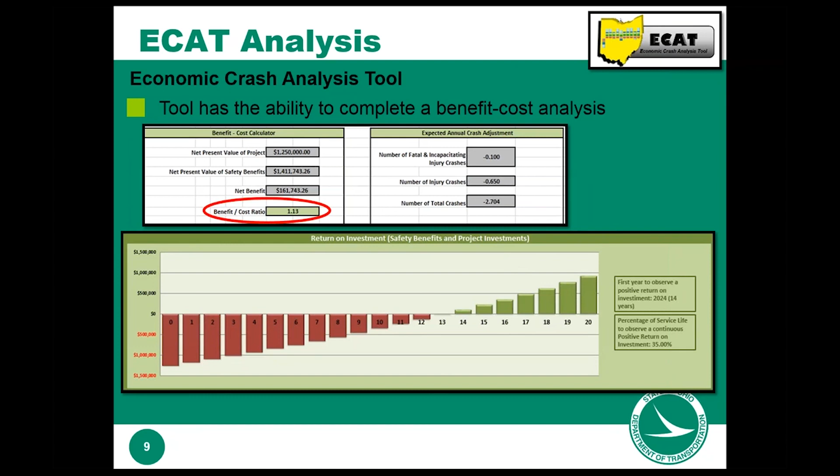So at year 14 is when we start to see the positive return on investment based on the safety benefit that is applied out there.

So that's just a quick overview of our ECAT tool, but within that tool, we do have a CMF table that goes with the countermeasure selection. So you saw the construct left turn lane that we chose as a countermeasure. Behind the scenes, there's the CMFs that are applied towards it. Within the tool, we have a tab dedicated to CMF selection, and everything on there is information obtained from the Highway Safety Manual and the CMF Clearinghouse. I think we have nearly 60 preloaded CMFs available on there for selection.

And so there's several items in the spreadsheet as far as IDs, the site type, which you can see the 10 different site types off to the right-hand side, countermeasure name, the suggested service life. We also put the star ratings in our spreadsheet, and we typically, like several other states, use the 3-star minimum.

And then if our districts or locals are filling out an application and going through this tool, and they don't see one that's on that list, then we do refer them to the clearinghouse where they can reference several thousand other CMFs if it's not one that we have on there that's commonly used. That list was built from ones that we've commonly used over the years, and ODOT used to have a rate of return tool before this ECAT tool, so we kind of just carried that list over also as more commonly used ones that we've dealt with in the past. And that list continues to be added to, and that's how that's generated.

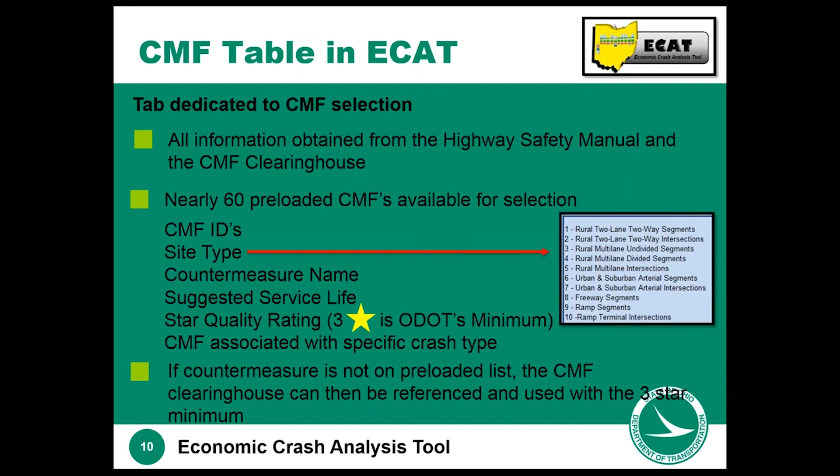So to go along with that, this is the CMF table that has its own tab in the tool, and I just split it here so that you could see it going from left to right of different attributes that it has within it. So it has all the site types in the upper photo, and which countermeasure it applies to—does it apply to rural multi-lane intersection, freeway segments, that sort of thing.

And then in the bottom one, it carries over. It shows the countermeasure name, suggested service life, intersection related, the star rating with that. And then for each of the countermeasures, we have the actual name, and we have it linked to the study, the research report that goes with it from the clearinghouse as to where we got it from.

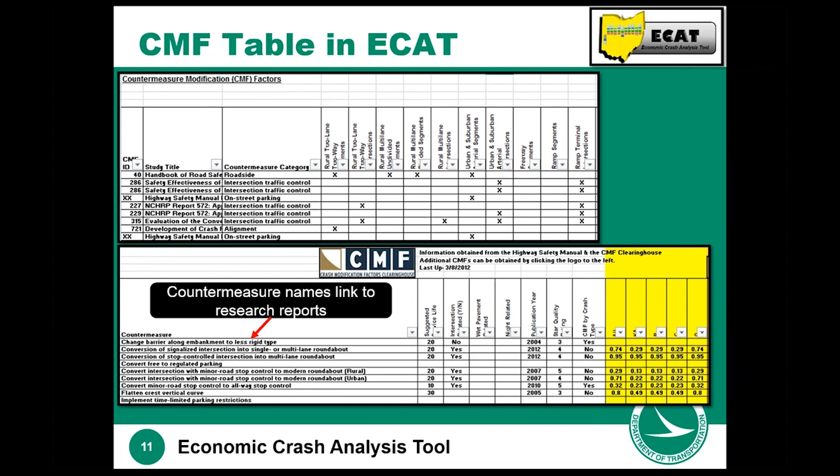And so within the table, how are the modification factors correctly assigned? If the CMF states that the crash type is what it's based off of, so if it says that it's set up for all crash types, then it has the severity values assigned over here as the modification factors on the right-hand side. Or if it's designed for a specific crash type, then we list out the KABCO scale accordingly for each of the severity levels. So in this screenshot, I've just shown the KA, and you can see the countermeasure names here.

And if you just go off to the right-hand side, you can see, okay, for the first one, change barrier along embankment to less rigid type—you can see that that one is specific to the crash type of fixed object, other object, that sort of thing, versus ones below it here where it could be universal across the entire crash type. So that's a way that we have them divided up, just to verify that it's getting applied to exactly what the crashes that it's designed to fix, and not coded incorrectly.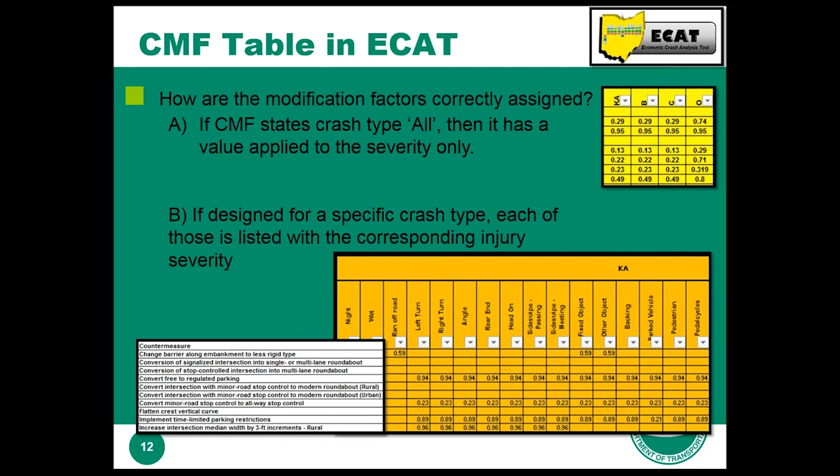So after the ECAT tool gets processed, the Safety Application Review Committee reviews the applications that get submitted. After the crashes are submitted, it goes into the crash analysis tool, as you just saw, with the benefit cost and the countermeasures selected with the CMFs. It goes in for committee review.

These are several items included within that submission, like an electronic copy of the safety engineering study, and I wanted to show you the Excel file analysis that gets brought into these reviews too, like our CAM tool, our crash analysis tool, along with the ECAT tool. So we're getting a full picture from start to finish, looking at the crashes that were generated, then displaying the countermeasures, and the end result looking at the benefit cost, and also how it scores against other projects.

So to wrap up, some of the recommendations I wanted to conclude with today—and I'm sure a lot of other states are this way too—one thing we've really focused on here at ODOT is basing our decisions off of a data-driven process.

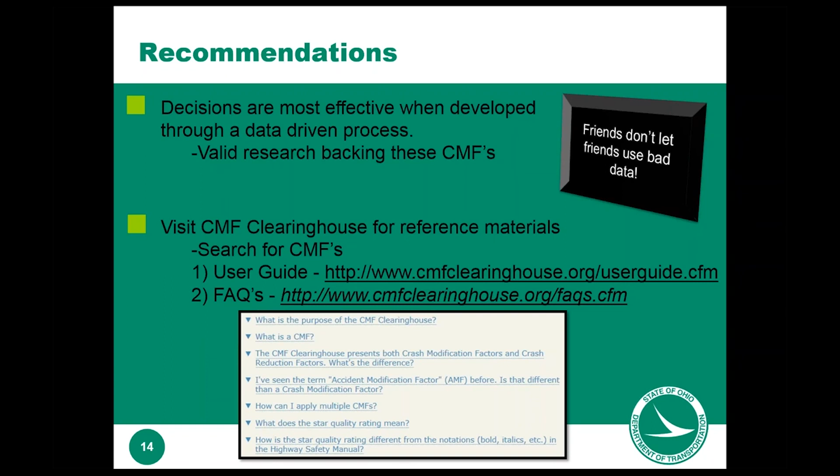So as a follow-up, that's my presentation, and if anyone has any questions, I'll hand it back over to Daniel.

Thanks, Mike, and we like your Chevy Chase CMF here.